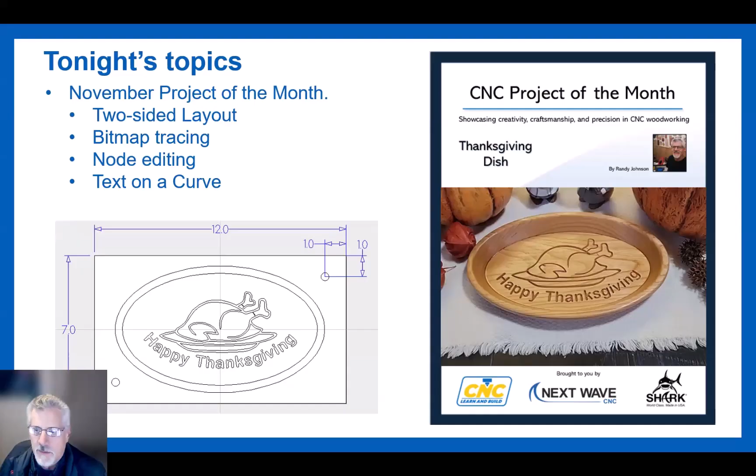So first off, most of you, I'm sure, have brought photos into VCarve to do tracing. I like to remind people that if you do a hand sketch, or somebody does a hand sketch, you can also bring that into VCarve just like any other bitmap and trace it. And that's how I did it for this project.

There's this little tutorial out here on how to draw a turkey. So I thought I'd draw my own turkey and use that as the piece of artwork. However, that colored photo that you see there on the screen, that would also work if you wanted to bring that in and actually use that for a tracing.

But I thought I'd give a try at doing a little felt tip pen work with the Sharpie. I like to draw it at full size, and that way the thickness of the line that I draw is pretty much the size of the line that comes into VCarve. If you shrink it down in VCarve, then of course the lines get closer together, smaller. If you expand it, they get wider. So there's kind of a scaling thing that goes on when you trace a hand sketch like that.

But the other thing I want to point out is that when you're all looking for artwork for a project like this, one of the places I spend a lot of time on is called Pixabay, and there's a lot of free clip art out there. And this pumpkin, for example, when you sign into Pixabay, most of the artwork is free, but they do have some stuff that's for sale. And you kind of have to watch it because, like a lot of these websites, it's a little tricky. You don't always know which one you're clicking on, if they're going to charge you or not, but it is divided up, so there's a lot of free stuff out there.

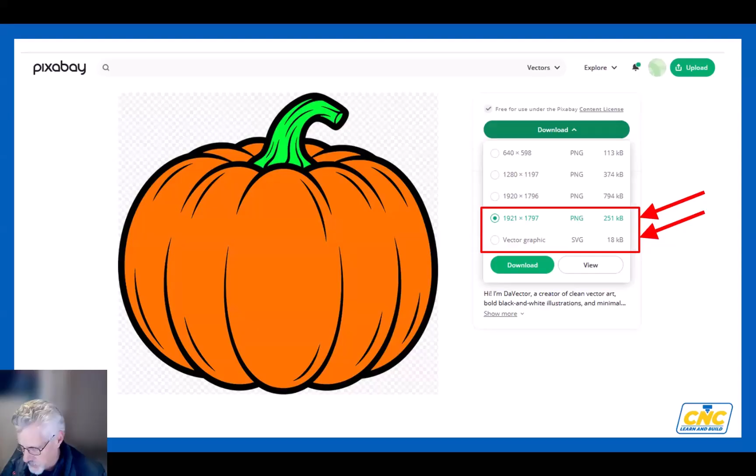Now, the bitmap or the PNG format, the photo that you see right there, you can bring that into VCarve and you can trace it like other projects tracing it. But if you're out at one of these websites and they offer you the chance to get the vector graphic, you might as well grab that and download that and use that, because most of the time that's going to save you a good bit of work and simplify it because you don't have to trace it. Here's a side-by-side comparison that the bitmap coming in is really, it's a photo, it's a piece of clip art, and that has to be traced. And where the vector graphics comes in, you pretty much go straight to toolpathing with it.

Now, what we're going to look at come December, when we start looking at the Christmas ornaments, I've started on that project, those ornaments, and there are some vector files that come in, and they still require some cleanup. So that's one of the little things we'll be looking at come December, what to look for.

But mostly what you're looking for are lines that are either duplicated, overlapping, you've got loops, you've got things that cause problems for VCarve. But every so often you'll come across a nice graphic like this one, which is nice and clean, and this pumpkin would carve real well just as it is.

So when you have the chance to get a vector graphic download, go for it, because it'll save you some time and you'll usually get cleaner lines out of it.

So with that, we'll hop over to the V-carve demo. Okay, so this dish that I made, this is cherry. It comes out of inch thick material.

And when you set the project up, of course, you'll go into job setup, if you're setting this up from scratch and picking your dimensions. But the two-sided setup, in this case, we're going to be surfacing or zeroing the Z off of the top of the board, whether it's the bottom or the top of it. There are times when it's valuable to surface off of one or the other. But for this project, since the board that I was dealing with is a nice consistent 1 inch thick, and there are no details that are of a concern as far as which surface I zero off of, I'm going to do it both off the top, the material surface. That just keeps everything simple.

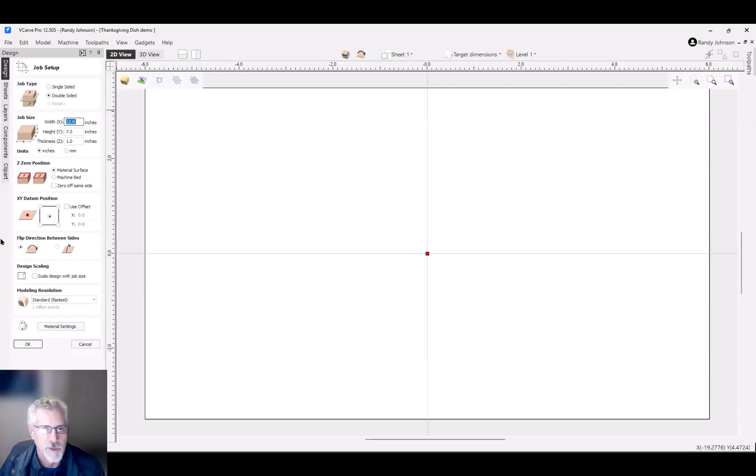I'm also going to put the XY datum in the middle, and then you have to decide if you want to flip left or right, or front or back, or top and bottom. And that's just kind of personal preference, depends on the project you're doing. In this case, I typically will flip left to right. It just seems more natural. Also, when I'm doing my imagery, the back image that way is still right side up, even though it may be backwards. So left to right is usually what I do, but it's just personal preference.

And we'll continue. Okay, so I've got some extra drawings in here. This is kind of how when I do an initial drawing, I'll set up what I want to accomplish, have a general thought for it. So up here at the top, these markings that are in red, the dimensions that are in red represent my fixed dimensions. These are my outer dimensions. From these dimensions are the ones I need to work with. I want to try and stick to those as close as possible.

And then the red dimensions down here, I want to put a 1/4 inch bottom, a 1/4 inch side on it. I want a 0.3 of an inch lip. And then this one that says 0.235, I wanted that dimension to be less than a 1/4 of an inch. And so to draw this out, it's a little bit back and forth on it, but starting out with a simple rectangle representing the side view. So let's go 10 inches on that for the width and 1 inch on the height.

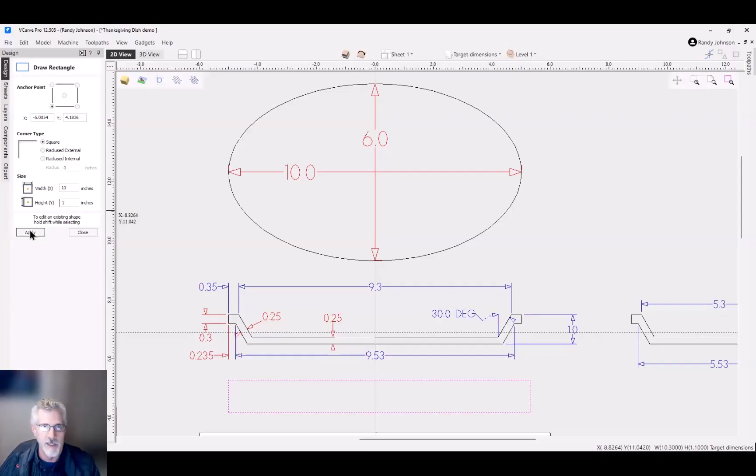And then it's kind of just simply a matter of deduction or taking away material. So then from here, there's lots of ways to do this. I'm just going to make it real obvious here. I'm then going to go in here and draw a rectangle on the bottom. You can see there on the right side, it says it's a 1/4 inch tall. So that snaps to a 1/4 inch, which is nice. So I'll just let go of that.

Then I'm going to go to the top up here, see if I get it to snap to 0.3 of an inch. There we go, or 0.3. That looks good. And then I start playing with some of my other dimensions. And since I already have these dimensions up here, I could use them, but let's go in and I'm just going to take a grab here. And this one is 0.35 like that.

And then to keep things simple, I can take that whole design. And if we notice that my datum, my X datum here is going vertical right there. If I make sure that this drawing that I've just created is centered on that, and it looks good, I can then take that little rectangle that I drew. I could use my mirror image tool and flip it about the job center, and it'll flip it right over to the other side. So I've got that going on for me.

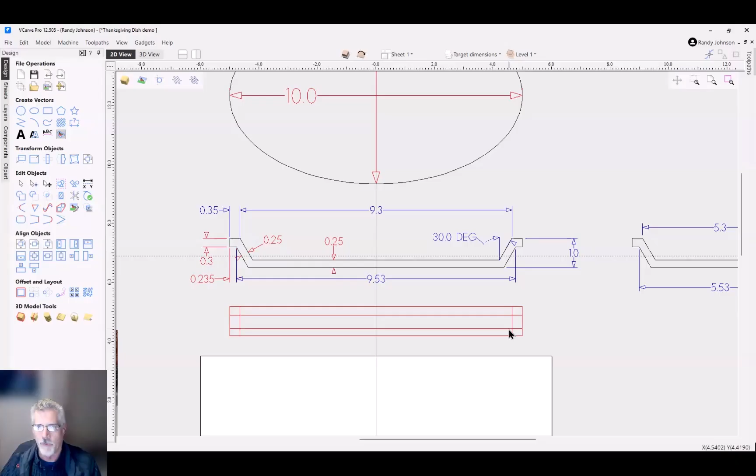Then we want to connect this upper quarter here down to the bottom with a 30-degree angle, because we're using a 60-degree bit. So I'll drag that down, depending on how close we zoom in there. So there we go, right? If I can snap it, there's 60-degree. So that gives us our overall 30 for that inside angle. And I'm going to mirror image that over.

And then I'm going to take that one and make my side, which is 1/4 inch thick. So I do my offset.

Now, when you work with the offset, you've seen this also with the profile toolpath. You'll see it says left, outside or right, inward, and left. What that means is pretty obvious if you have a circle, if you're on the outside or inside. But that black dot represents the start point for that vector. Think of that as the starting line. If you were starting at that point and traveling this direction, the left is this side because you're starting at that point, and the right is this side. So it also seems to make sense if we say outward.

So if I click right outward, it should create a parallel line to this lower side. Type in our dimension, just like that. Now notice that if I go into that line, again, that's the start point. If I go into node edit, see how that's green? That's my start point. However, now if I switch that start point to the bottom and make that the start point, close out of this a second.

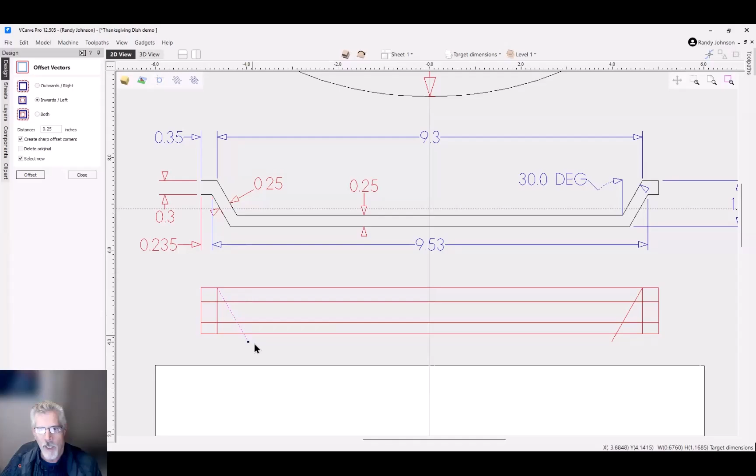Delete that line for a minute. Now when I go into my offset tool, notice that I need it to go to the left side, so I would select the opposite one. You want to watch when you're dealing with single lines, for that black dot representing the start point, to help you determine which side to go to. So this one, again, starting up there, this is going to be the left side also.

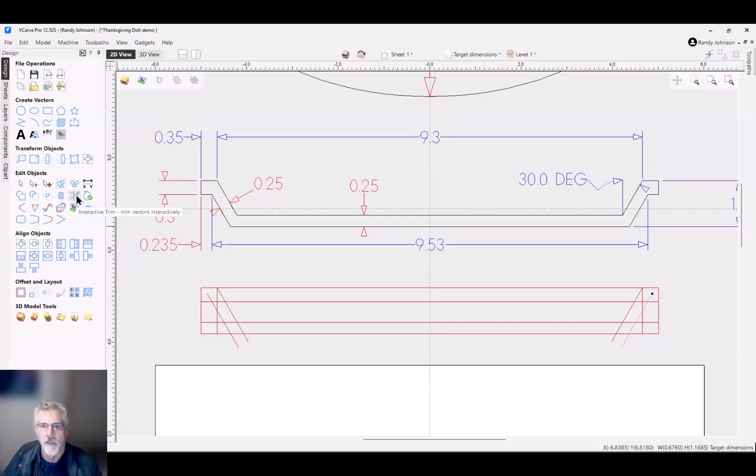So that looks good. At this point, we've got all the lines we essentially need, so we can go in and start trimming things away. So we'll start by trimming out these top ones, get the bottom ones along here, get inside here, and then get those.

And that's pretty much how I arrived. Now, this cross section is really just for illustration purposes only. It was just to help me figure out some dimensions. So now that I have that, I can go into my dimension tool and strike the dimensions that I need. That's how I arrived at these other dimensions.

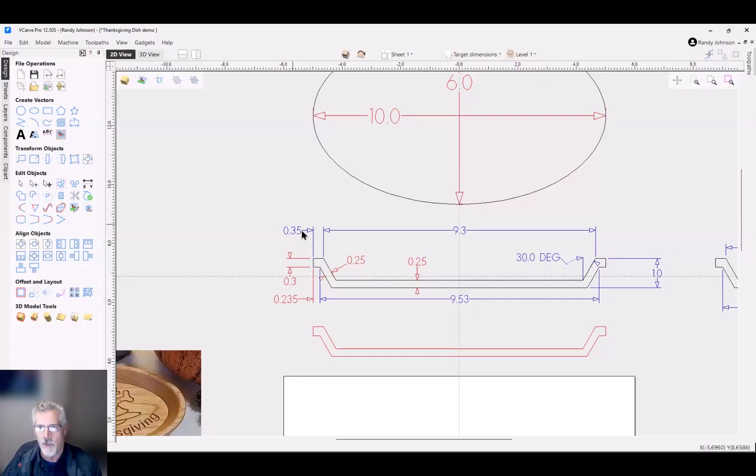Now, for practical purposes, I rounded some of these off to 2 decimal points or 3 decimal points. This isn't that critical of a mechanical shape that a small fraction of an inch here is going to make a difference. So to keep things simple, I kept things down to 2 or 1 decimal points.

So now that I have all those basic dimensions, I can go into my main drawing and start laying out my shape. So I'll take the oval tool. Again, we're going to take the anchor point. We want the anchor point to be at the middle of our project, so we'll type in 0, 0 for anchor point. And then the width of our project is 10 inches by 6 inches, and click create.

And I made an error. Yep, I have to go back in, let's undo that. 10 inches, not 13. Here we go. Okay, so we've got that set up.

Then I can start going in. I do have these dimensions here, 9.3 and 5.3. I also have the offset. Now, I want to point something out here. The offset tool, which we've used a couple of times, is really convenient. So if I go in here and I want to go inward by 0.35, I could type in 0.35.

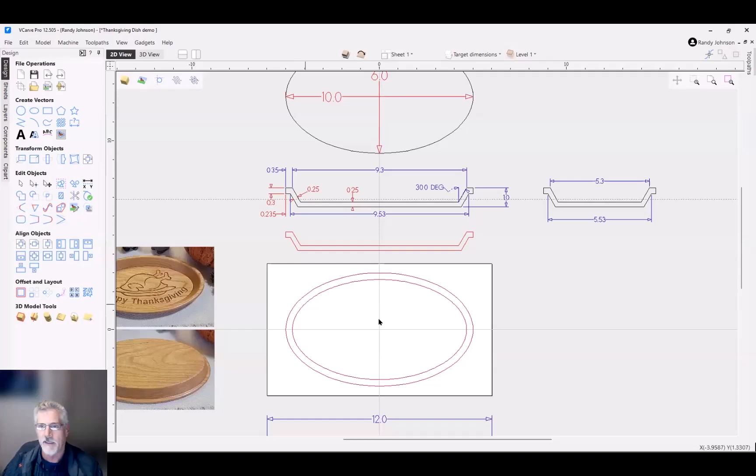Like that. And casually looking at that, it looks good, and sometimes it works out fine. But notice something, let's see if it does it this time. If I go into my outside vector and click node edit, you see how we have 4 Bezier curves around the outside. That's a nice clean image.

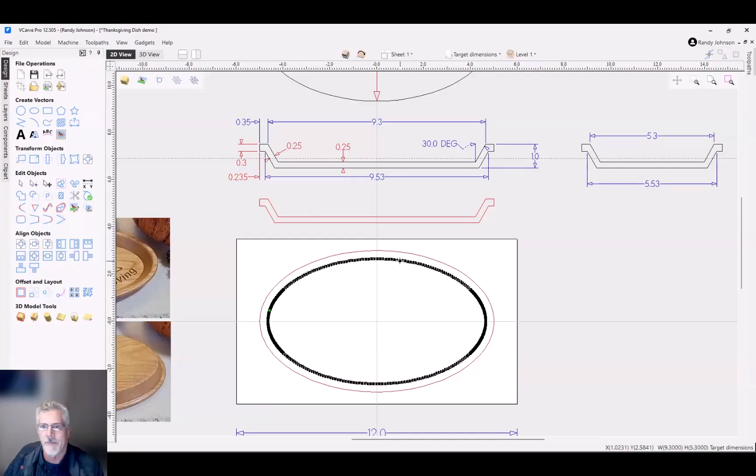The fewer points you have on a curve, usually the better, because the router is going to use calculations to go from one point to the other, and the more you have, sometimes that can actually slow down the router. If I click on this middle one, look what I have. When you use the offset tool, these aren't even Bezier curves, these are all straight segments.

When you go to carve this, the toolpath has to calculate the distance from each one of those nodes, and you end up with G-code, a separate line of G-code for every one of those nodes. It can really slow down your tool pathing, and rather than a nice curve, you'll end up with straight lines between all those points.

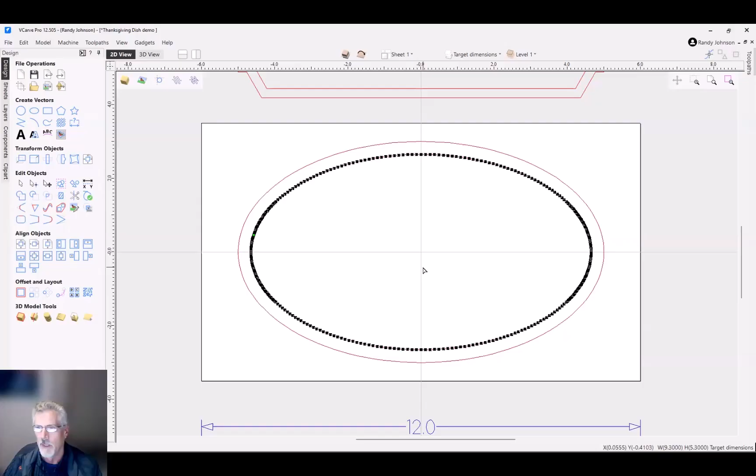You may not notice it, or it may stand out. I've used this approach sometimes with more organic shapes that have more S curves or something like that, and I've actually seen it start to flatten some areas out and get little kinks in it.

So rather than use the offset tool, let's delete all of that. I could go in again and draw another rectangle or another oval instead. Or what I tend to do, just from a shortcut standpoint, is hit Control C for copy and Control V for paste.

If we look here, you can't really see it, but there's two lines at this point. While that second line is still active, I go inside my size tool, and this is where I'll uncheck this—well, let's just leave it checked for a minute. I'm going to type 9.3 up here for the width.

And the height ends up being 5.58, where over here we're at 5.53. Oh, I'm sorry, that is correct—5.3 is right here for the width. Now let's figure out what's going on there.

Okay, let's apply that. All right, so what I had set up here was I had my link XY checked. So when you link it, it reduces it by the same percentage in both directions.

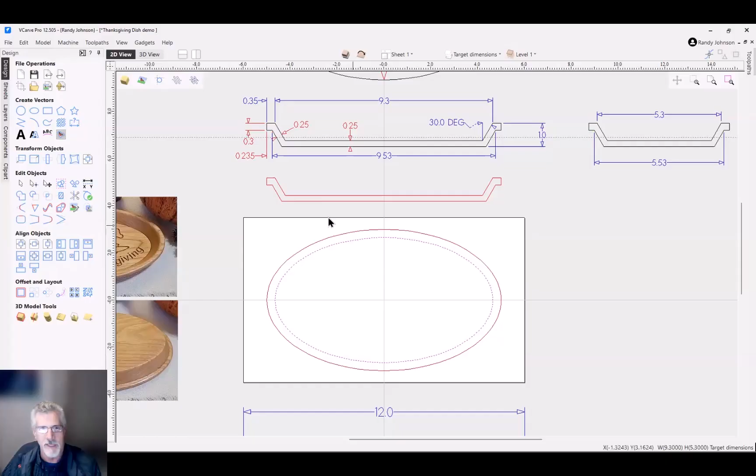And now I have a nice even space all the way around. That was kind of a long approach to doing it, because like I said, you could just go into the draw ellipse tool and type in another one. I tend to do it this way because I use the Control Copy and Control Paste keys a lot.

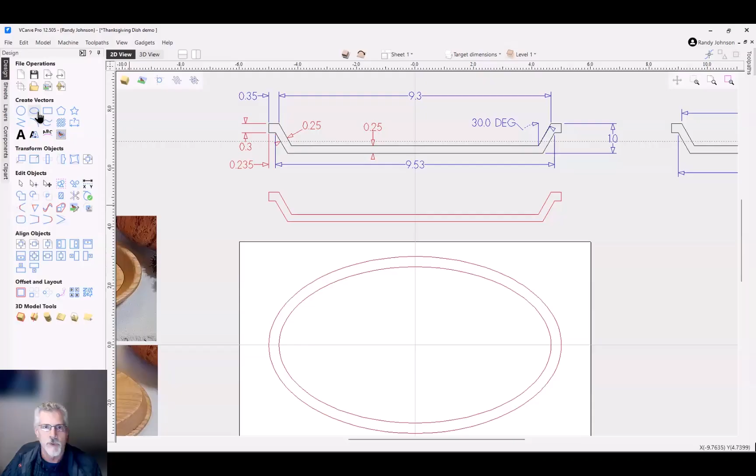So at this point we've got these two lines going, which represent these two points right here. Now we also need a line for this point and for this point at the bottom. So I'm going to take the long approach here and go into the draw ellipse, and type in my bottom dimension.

Which is 9.53 by 5.53. So we'll type in 9.53 by 5.53 for that. And then—looks like I still might need one more. Nope, I don't think I need any more dimensions.

Now what I'm going to do—this vector right here actually belongs to the bottom, it belongs to that point right there. So I'm going to right click on that and do a move to other side. You can see how it turned light green, and that's because it's on the other side. I also want my overall perimeter vector on the other side also.

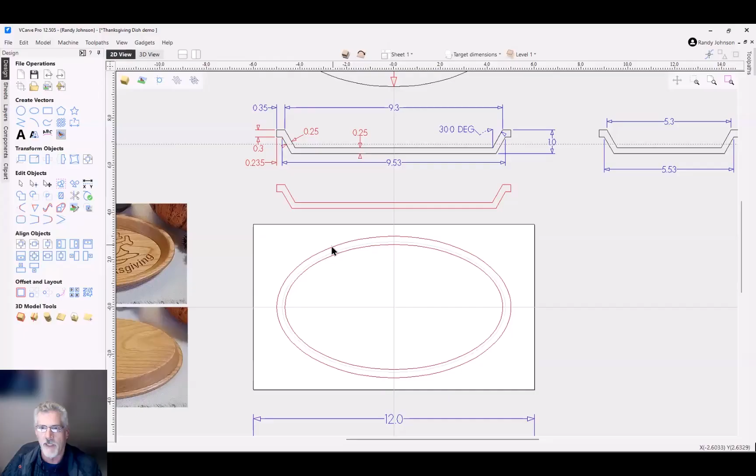So I'm going to duplicate that—or actually, rather than move it, I'm going to copy this one. Now up at the top here we've got flip to the other side, so let me flip to the other side for a minute. And there you can see the two vectors.

Now, the reason I only need those two vectors on the back side is because of the way the chamfer toolpath works—it's going to use this line right here. So I don't actually need a vector for this little bottom corner. I only need these two vectors on the top side and the other two on the bottom side.

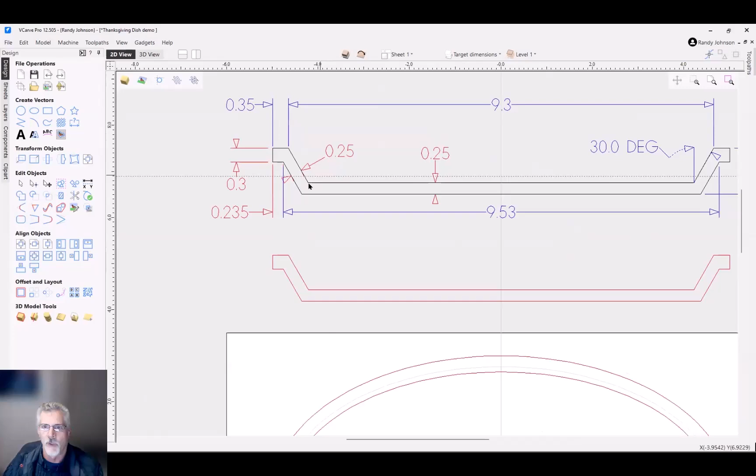Notice I also don't have an inside vector for this corner right here. There's no vector for that, because when I set up the chamfering toolpath, it's going to go from this point down to that, and it'll determine itself where that has to end.

Okay, next up, if we look at the design, because it's a two-sided project, I also need to add some holes for the registration pins. So let me turn those on.

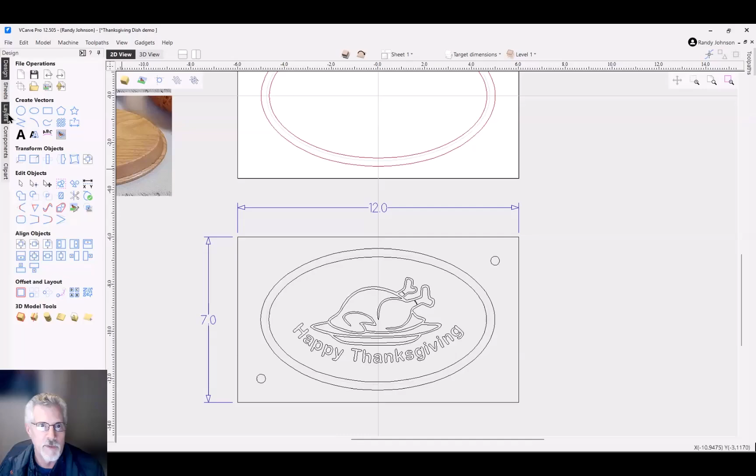So there you can see how I've got a couple little pieces of plastic tubing that I'm using for registration pins. It's all spelled out in the how-to document you'll get with the newsletter and download. What I use for these pins is actually 3/8 inch PEX plumbing pipe, like a supply line for under the sink or a toilet. I cut it off with a utility knife. I like it because it's very consistent in diameter, inexpensive, easy to cut, and it's not going to damage my router bit if I hit it. It's kind of consumable - if I need another one, I just buy a length of it. And if I lose one up the vacuum, no big deal, I'll cut another one. So that's what I use.

And the diameter of the hole, I set that at 3/8 of an inch. And in this case, we're going to go an inch in from each corner. So to set that up, I'll get the circle tool and set the diameter at 0.375.

Based on the dimensions that I have for my overall project, I'm going to measure off the middle. So off the middle, if I went all the way over, that would be 6 inches, so I'm going to come back 5. So it's going to be a positive 5 in the X, and a positive 2.5 in the Y. Let's see if that works out. And there it is - so there you can see I just drew that.

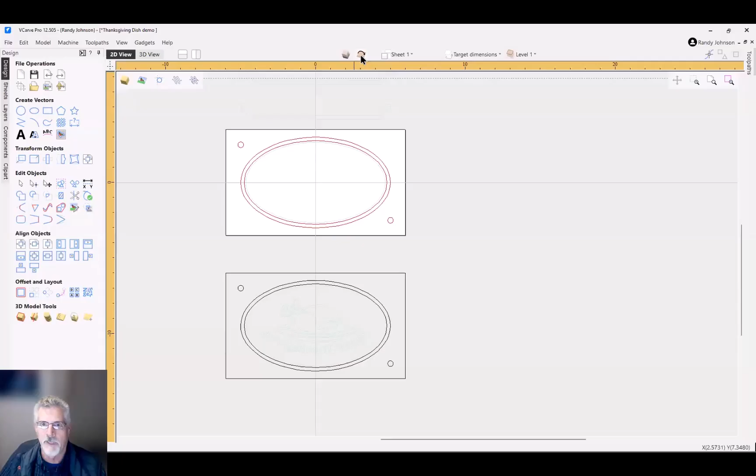Now notice how in this case it's the upper left and the bottom right. If we go back this way, it's the bottom left and the upper right. That's because we're flipping left and right. When we set up our table, we drill the holes inside the spoil board. This is actually the pattern that'll go on the spoil board so that the bottom faces up and the pins face down. And we'll take a look at that either more later today or next week for sure.

Okay, now that I have the basic setup going right there, the next thing is to deal with the graphics that we're going to set up. So for that, let me bring up - see if I have that. I had that in here someplace. I thought, there we go.

Okay, so that's the drawing. I imported that photo in here. It imports just like a piece of clip art.

Now, I don't need this whole piece of paperwork. And the way to crop inside of VCarve is to take a rectangle, draw a shape - you just need a vector going around your object. Hold the shift key down, select the clip art or the photograph, and you know it's selected when there's a little pink line going around the outside, usually darker in contrast. And then the crop tool is right here - you just click crop like that, and it just wipes out the background.

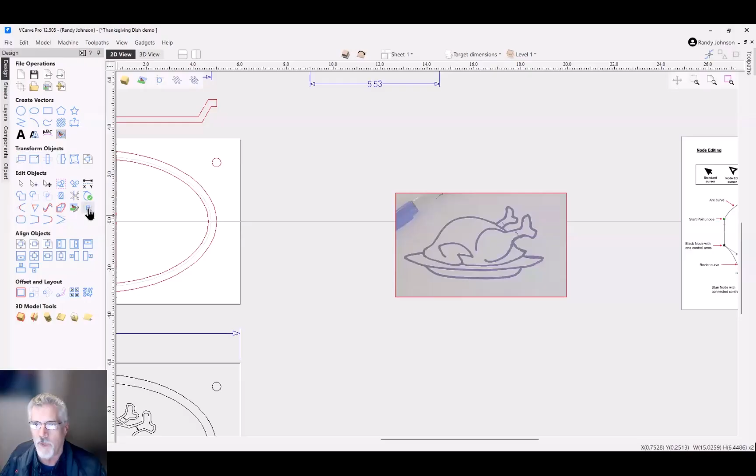And now if I slide the photo down, we still have the rectangle. We don't need that, so I can select it and delete it.

Now let me show you another little trick. Sometimes, like in this shape, if I didn't want that pen in there, I could take any of these shapes - even this freehand drawing tool works. If I just draw around this shape like this and go back and stop, then I'm going to click on the connect there. So it's connected - click, connect there. So now it's one continuous vector.

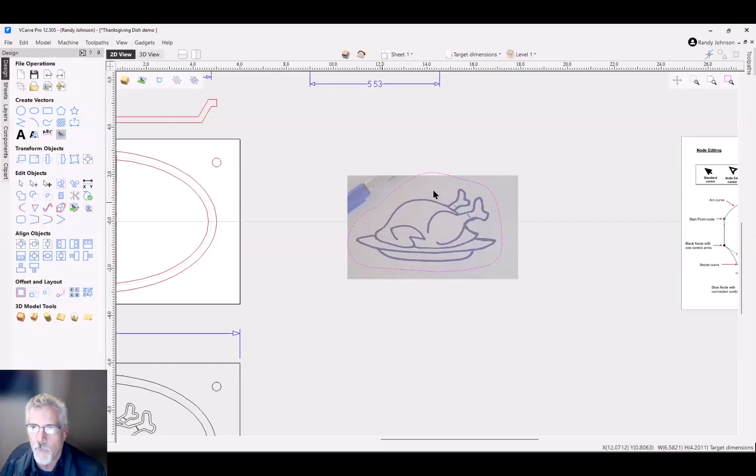Now notice when I hold the shift key down and select the photo, I'll do the crop again, and it crops it exactly to my line. So whatever your enclosed line is, whatever that shape is, you can crop it to that size. So that comes in handy.

Now to trace this, the basic tracing of this is pretty straightforward. We use this trace tool as usual.

Because there's some color here, and I used a blue ink pen on this originally, it's coming up with some different hues of blue. I really only need one, so I usually switch it to black and white, because that's really the image that I need. Then I usually put everything at middle to start with.

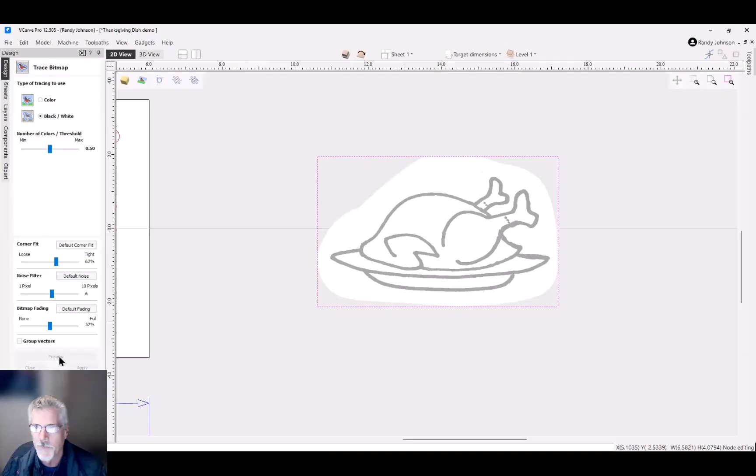I'm not going to group the vectors in this case. Preview, and there we can see the vector lines going all the way around. Apply and close. Now I can take these vectors. Let's drag that photo away.

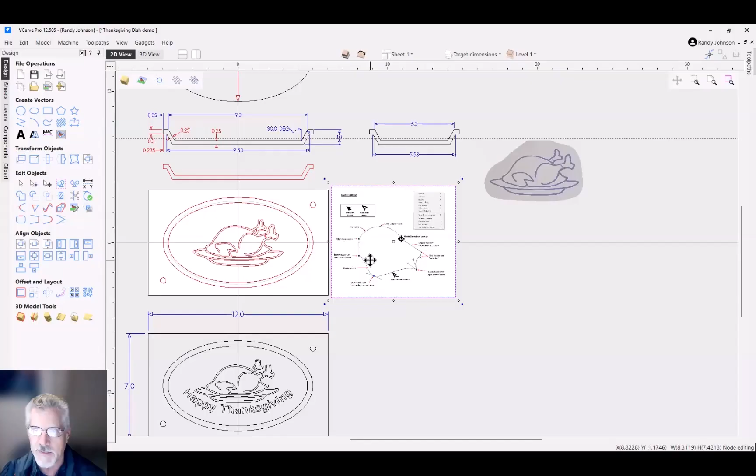I'm going to take that image and center it in my dish. And I'm going to drag this. This is some information - any of you who have looked at the online class, or taken any of my classes, this is one of the diagrams I offer people, and I'll include it with the email I send out. This gives you a rundown of what different node edit points look like.

I do a full demonstration of that in the online class if you want to take a look. But tonight I'm going to use this information to point out how we might want to node edit this turkey. First, if I select all that information and all those vectors, go down into node edit mode, I have quite a few extra nodes in there. It's not too bad, but it can be simplified.

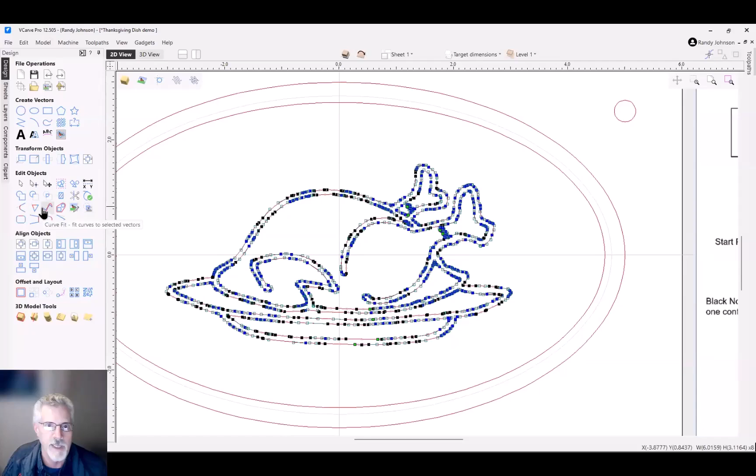So the first thing I like to do is go into this tool called Curve Fit Vectors, which helps remove some of the extra vectors. I'll always use Bezier curves about 90% of the time, with a tolerance of 0.005 - about the thickness of a piece of paper. For this drawing that's quite acceptable, if my line ends up within that much of the original line. I'm going to keep sharp corners because there are a few areas here I want to keep sharp inside corners. And I'm going to do replace selected vectors.

When I click preview, notice how it simplifies it - one click and we have like a half or a third as many vectors. This looks pretty good, so I'll say okay. As a result, everything has gotten a lot smoother.

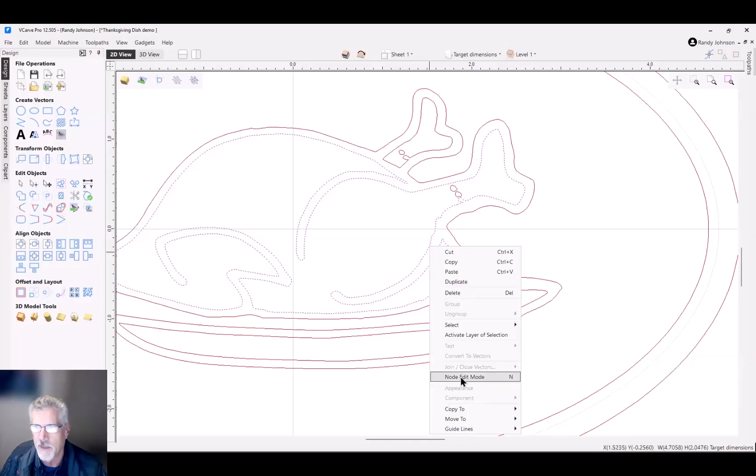However, we still have a couple of areas here with some bumps in it - maybe this drumstick, we want to even things out. So with whatever drawing you're working on, if you want to even something out, this is where learning to use node edit is really handy. I'm going to select that line, go into node edit - the N key is the shortcut for that - and that shows all these nodes. Remember, usually the fewer nodes, the better.

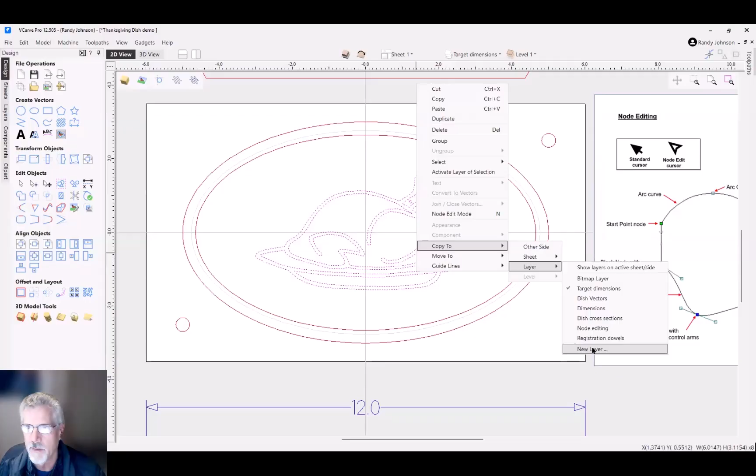So I'm going to start up here. Actually, I'm going to do one other thing first - go out of node edit. I'm going to copy all of this, and copy it to a new layer. I'm going to call this 'original' and give it the color green.

So there's the original. Right now my red vectors - let's do something here, let's turn that off. I'm going to select all those vectors. The only reason I'm doing them in red is that I had the target dimension layer activated. So I'm going to move all of these over to my dish vector,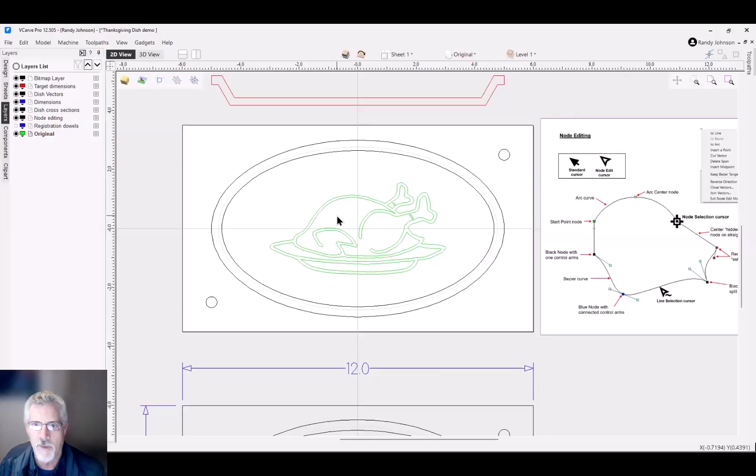which are black. Turn this one back on. Now notice how the green one is showing up even though the black one is there, and that has to do with the order things are in over here. It's kind of a reverse order - the one on the bottom is going to be the most prominent. I sometimes wish VCarve would flip this and make the more prominent one on top, but it's kind of the opposite.

So notice as I move this up in the order, when this vector goes on top of the dish vector, it actually means it's underneath it. Click like that, and now the green vector is hiding behind the black vector. If I turn this one off, you can see it's still there. So the reason I have that stacked - one more thing - is because I'm going to use it as my guide. I'll go into the original and lock that - you see a little lock icon here - that way I cannot edit or move those vectors.

I want those vectors to stay where they're at. So let's go in here, and I'm going to show you a little bit of node editing on this. We can see the green vector is back there - if you see it, it's still there - but I'm going to go into node edit, and this is where I go in and start getting rid of some of these extra vectors. To start with, I'm going to work on the top side of this leg.

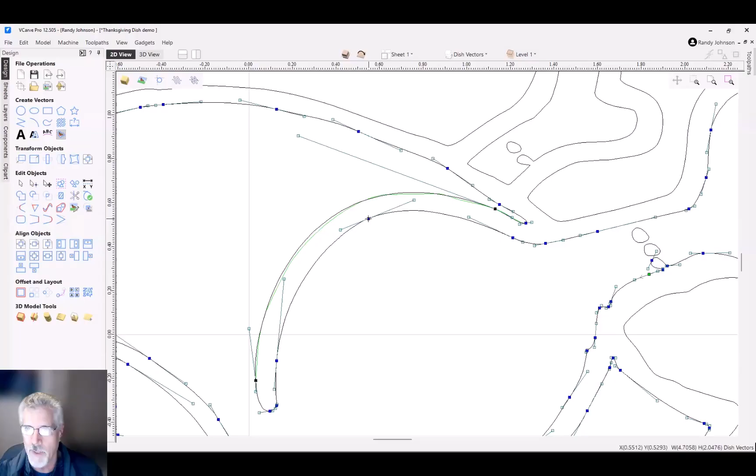A lot will depend on how much precision you need in your drawing, but this usually works quite well. Okay, here I'm going to hit the D key on the keyboard to delete that, and then I'm going to use this handle, go out like that.

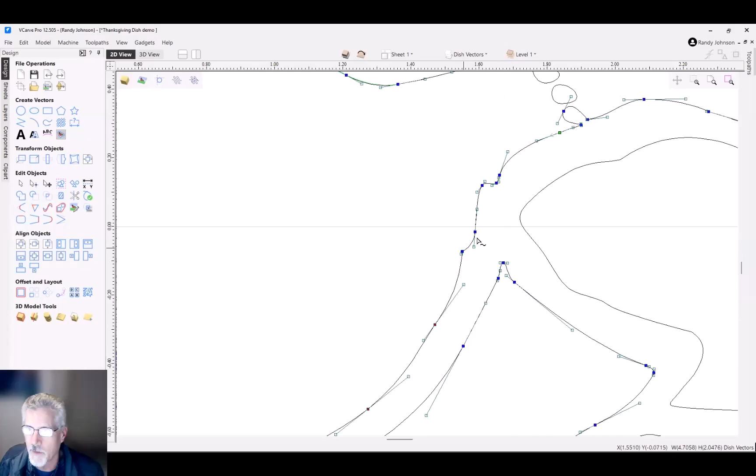Let's do the same thing down here. Now I'm going to hold the shift key down, click on that one, that one, that one, go all the way up along here, click on all the blue ones, and let's go all the way up to here. And then I'm going to hit the D key to delete all those, and they're all gone. Once again, so I've got a straight line.

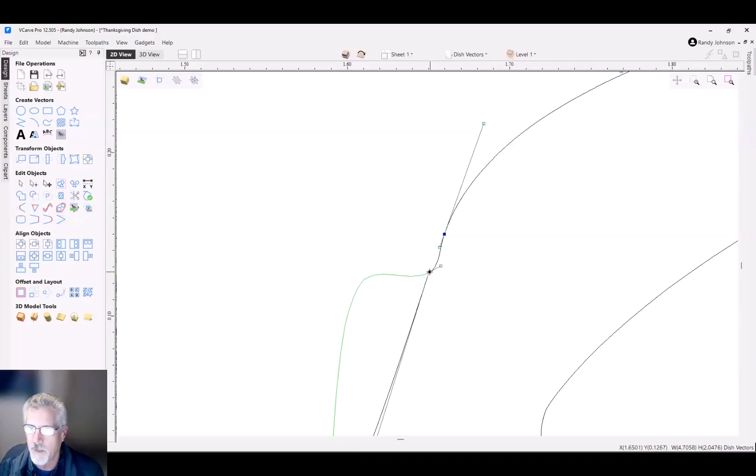So I can go in, convert that to a Bezier, stretch these down, get a nice even curve there. And then up here, let's just go ahead and delete this one. I'm going to delete that, grab that, and maybe I'll just move that out just a tad.

If you get in a situation where these two handles, like I'm dealing with now, just aren't getting you the curve that you need, you could then go into the middle and do an insert point, and it'll insert a Bezier handle in the middle, and then that one you can pull down or up if you need to. So don't be afraid to add an extra point - you just want to avoid a lot of extra points if possible.

Now, do I need to do this for this whole thing? No, I don't. But depending on the design you're working on, you may want it cleaner than this. Sometimes I'll just go in and rather than even do that, I'll just delete a bunch of points like this, grab the one that's there, stretch it down, maybe just delete that point. Let's see if I can delete that - delete, there we go.

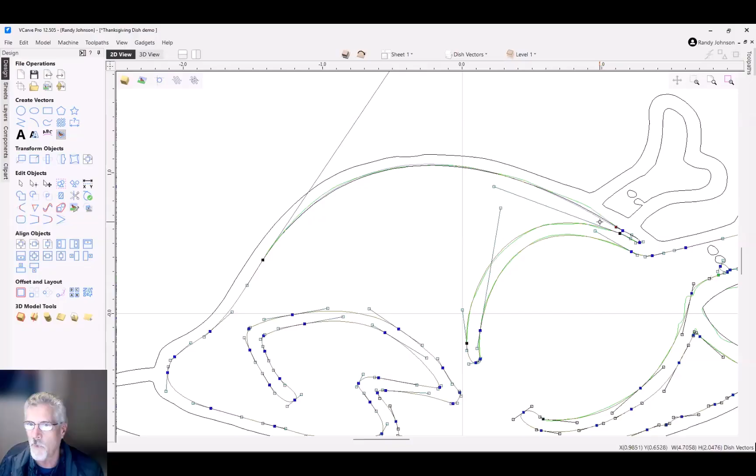You know, like up along the top of the turkey here, there's lots of extra points up here, so I could select them like that, hit delete, delete, delete. Once you get practiced with this, it's a little tedious, but it goes fairly quickly because as you can see, it's surprising how with only a couple of points you can match the line. I'm going to stop with that work there, but you can see how we've got some nice curves going on now where we reworked it.

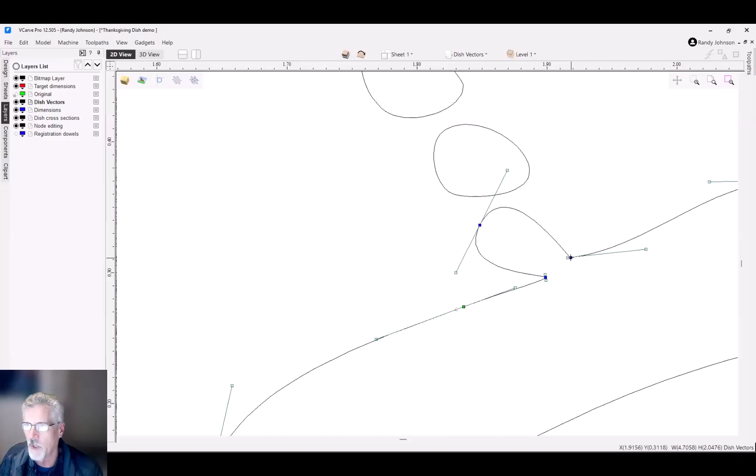You know, a situation like this right here where this little piece is connected - maybe if I want to do something different, I could go in over that node, right click, see if it'll get it here, right click, hit cut, cut that one. Then I could grab these up here like this, start working with those, decide what kind of shape I want. And then with that vector that's left there, I can simply connect it with the connect join tool. And then these, I probably want to bring down a little closer to each other, straighten that one out a little bit, and then I can do a connect on that also. And then I've just separated that little piece.

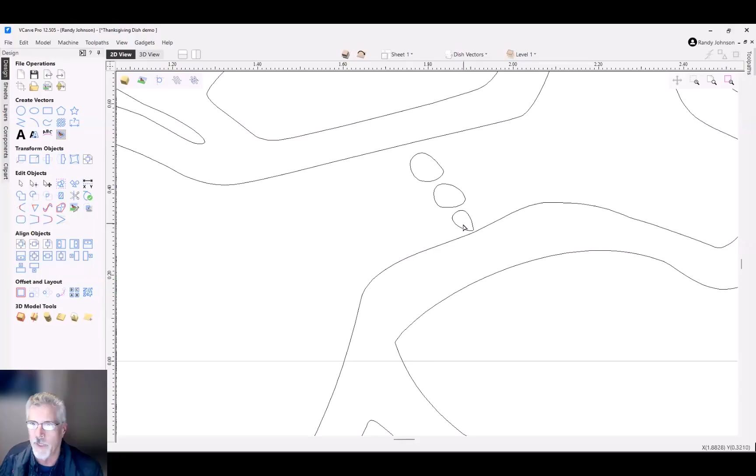So with that, I'm going to take that part for now and set it aside, and grab this one. Since this one's all done, I'll move that one back up.

I'll send this chart out, but let's look at it a little now. Each of those nodes does something different - you've got different types of line, and a right mouse click brings up a local menu. Based on what I have selected, I'm not able to change it to a Bezier, probably because it's already a Bezier, but I could change it to a line or an arc, and add or delete points. All these commands are available based on the type of node or section of line selected.

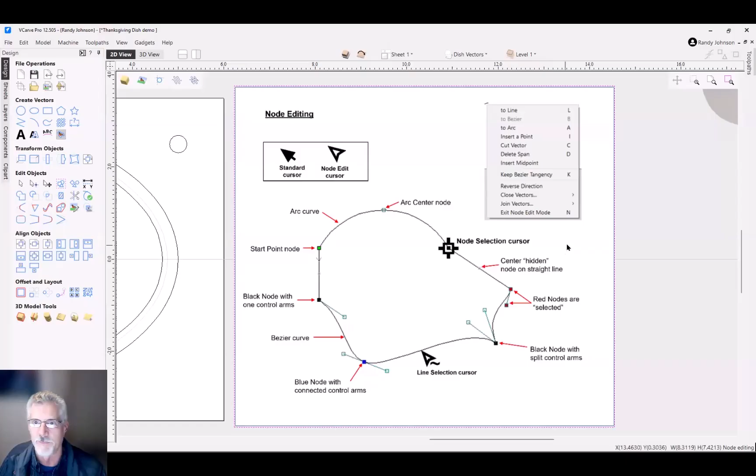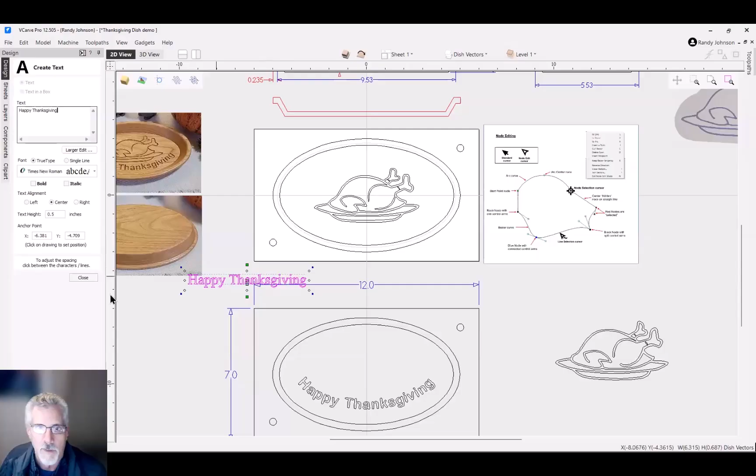Next up, we're going to type text on a curve. To start, let's select that inner shape right there - that's what I'll use for my curve. Before that, let's go into the text tool and type 'Happy Thanksgiving.' Close out of that, then select that curve and go into the text on a curve tool.

That looks pretty good, except we need it up a little higher. So I can add an offset distance - let's try 0.5 inches and see how that looks. That looks pretty good.

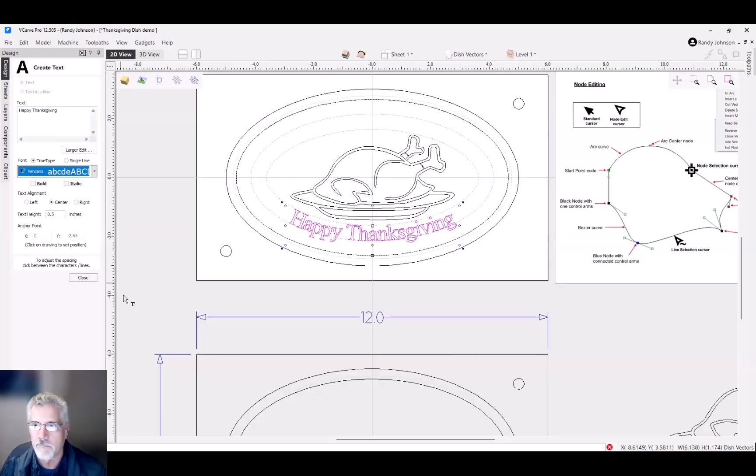If I want a different font, I go back into the text tool and look for different fonts, if there's a kind I might like. Let's try something like that - looks pretty good. Maybe I want it bold. Close out of that.

Now that I made it bold, we can see some problems here where things are too close. To solve that, we go back into the text tool.

Notice when I take my cursor and go up between a couple letters, you see a little symbol - a V and an A on the outside, and two little arrows pointed towards each other in the middle. That moves things closer together. If I hold the Shift key down, those arrows change direction, and now when I left click, it moves those letters apart. So I can just go to each spacing and get the spacing I want.

Right now, mostly I'm taking things and moving them away from each other, but there are times you'll use it to move them towards each other. This one's a little tricky, so I'm going to get in close. There we go - got that, looks pretty good.

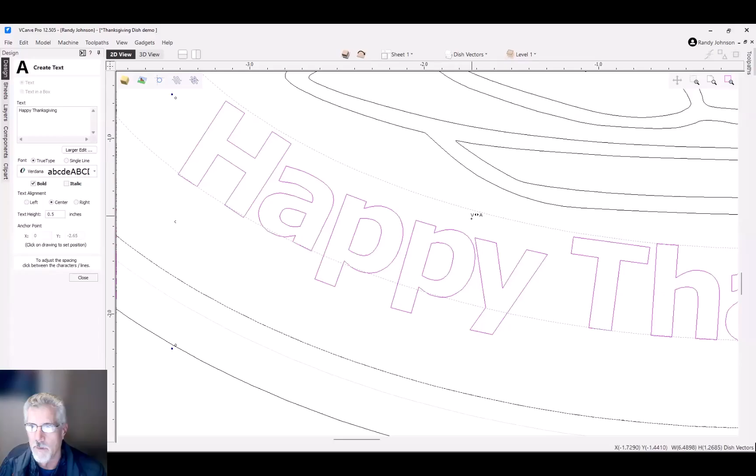Then I'll go over here, a couple of clicks on each of those, and put a little more space between that. Okay, so we've pretty much got that all set up.

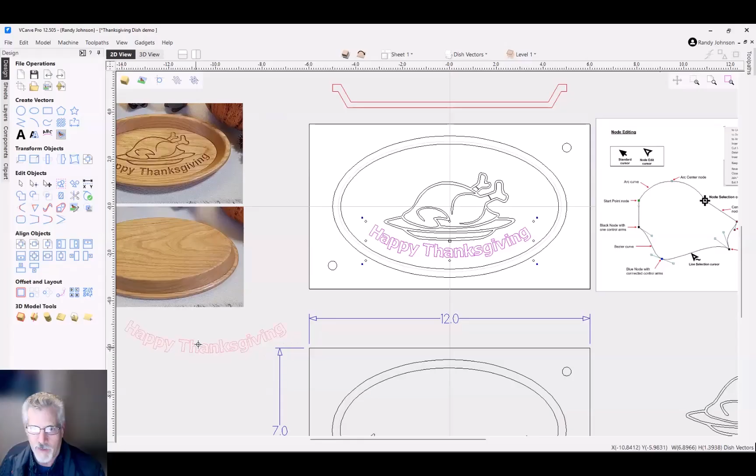Now, that was actually pretty painless. There are times when it doesn't happen that well or that easily. Let me take that for a minute, drag it down here, and make a copy of it. I'm going to do this all over again, and set this up a little different. I'll take that vector and go into Node Edit, and notice how the start point is at the top.

Okay, we got lucky - that's an easy place for it. But you may find that the start point might have been here at the bottom, and I can make that the start point.

This is usually what throws people a curve, so to speak. If I select the text and that curve, and now go into on a curve - it's like, oops, I'm upside down. What's going on here? Let's see - let's go on the other side of the curve. Well, that puts it on the outside. How about below the curve? Well, that's nice if I want it on the top side, but I want to get it to the bottom. How do I get it to the bottom? You could go left, you go right.

Well, the simplest thing to do is grab that. You see the green button up there? That's the center point for your text, not the start point for the oval, because remember we moved that to the bottom. But if I grab that, I can move the text and drag it, snap it down to the bottom. Now, of course, we need to flip it.

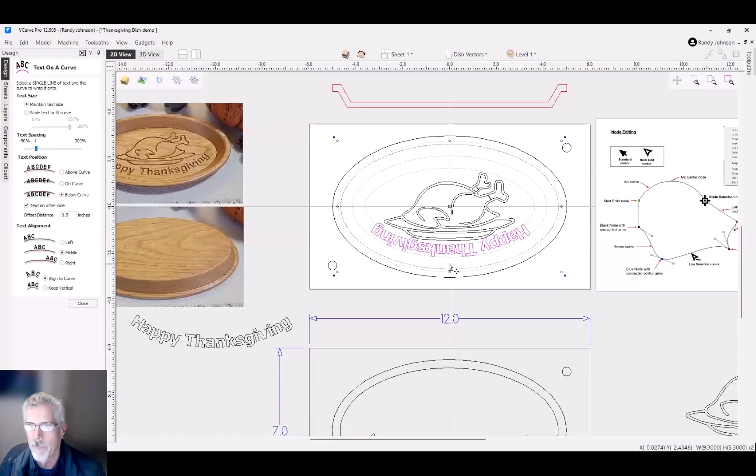So let's go above the curve. Okay, that's the wrong way. Now let's go the other side of the curve. And there we are, we're back in the money. So sometimes you just have to click around and understand, because you've got 2 or 3 options there that are flipping things around.

But once we've got that set up, we can now save it as such. So we've got the vectors for the front side pretty well set up. The one thing we'll end up doing yet, in fact I can see right now, I'm going to move this over and even move this up maybe just a little bit like that.

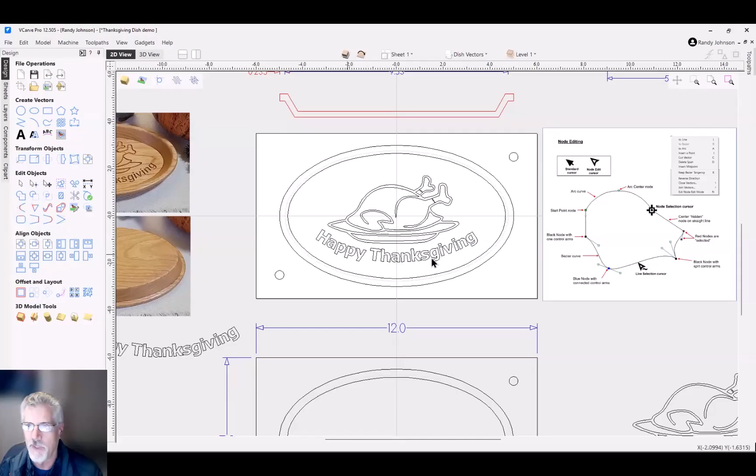Once we start doing the tool pathing, we'll find out whether or not this Happy Thanksgiving is in the right place or not, because we need to make sure it's set in far enough from that bottom edge, and we don't have a line for that right now.

We could calculate it, we could add it in. That'd be one way to do it. If you wanted to do that, let's just do a calculation on that. I'll go get my dimension tool, and let's turn the snaps on. Let's pull a dimension off of horizontal.

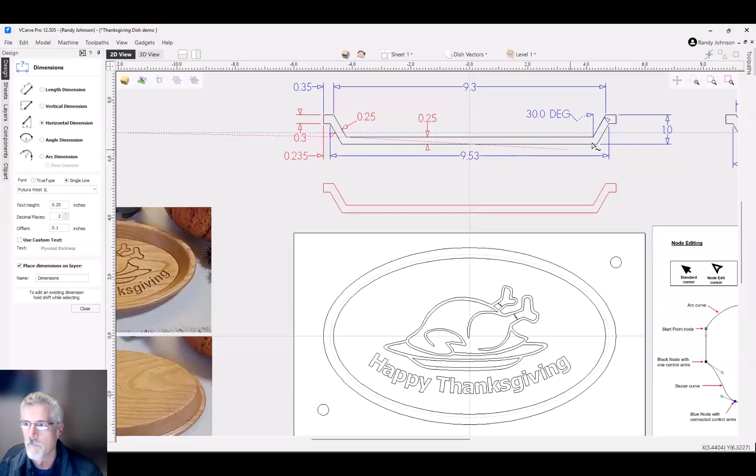Okay, so it's 8.43 on that inside, by 4.43. So if we went in and set up an oval now, 8.43 by 4.43, and that's the inside of the dish. So you can see why, before, this type was probably down here, it would have gone up on the edge of the dish.

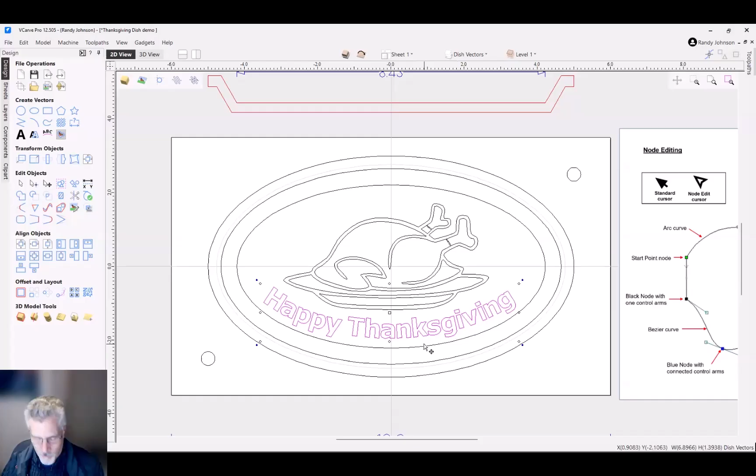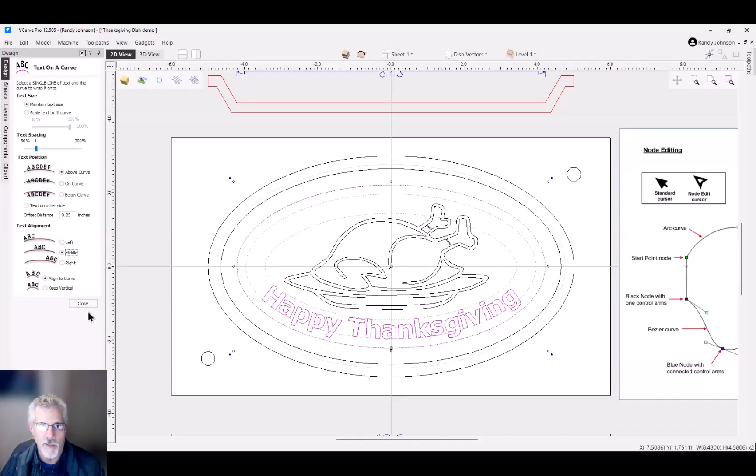So again, like I've said before, there could be 2 or 3 ways to do things. This is one way. I could even use this curve, if I wanted that curve to actually be the curve for my Thanksgiving text. Let's go ahead and recorrect or recenter that. I'll select that curve, go back into my curve tool, and now I can back off on the amount of offset. That looks pretty good, so that's going to be a nice even offset now from the inside corner of the dish.

If we go to the bottom side, there's not much to say about the bottom side until we get to the tool pathing. But if you wanted to add some sort of inscription, made by, or the year, or some poem or something like that, you can certainly add that to the bottom as well, same way that we did on the top.

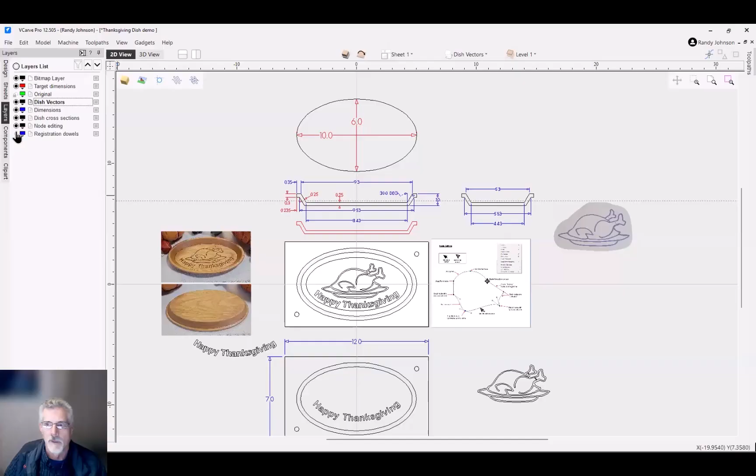Those alignment holes, do they go all the way through? Not necessarily. The index pins, or registration pins, that I'm using I cut those at about 1 inch long, and then I make my holes about 0.55 deep. So they don't in this case. On thinner boards, they may go all the way through.

Into your spoil board? In my spoil board, they go down, like there's one right here, about 1/2 inch deep into the spoil board. So do you drill those holes in the spoil board with the router, the CNC? I do, yes, absolutely. In fact, you can see how this is the top, the one we've been working on tonight, those index pins right there.

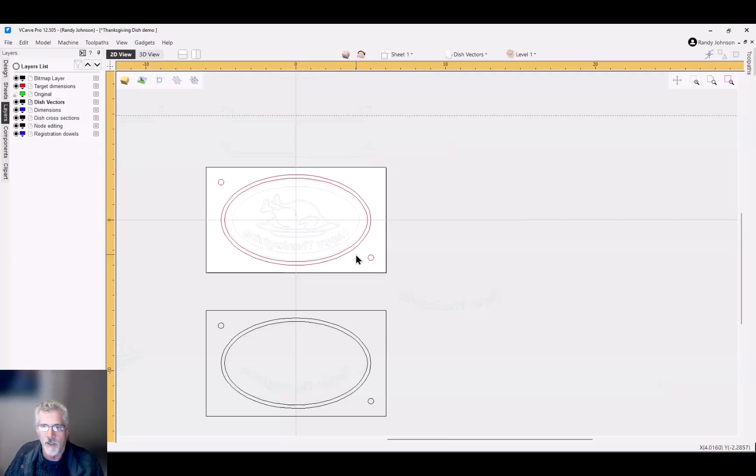I'm getting ready to flip this over. When I flip it over, if I flip this drawing over it, let's see here, flip this over right here, you can see how those index pins are in the opposite corners now. So these 2 holes that you see right here are the ones I will actually use to drill the holes into the spoil board.

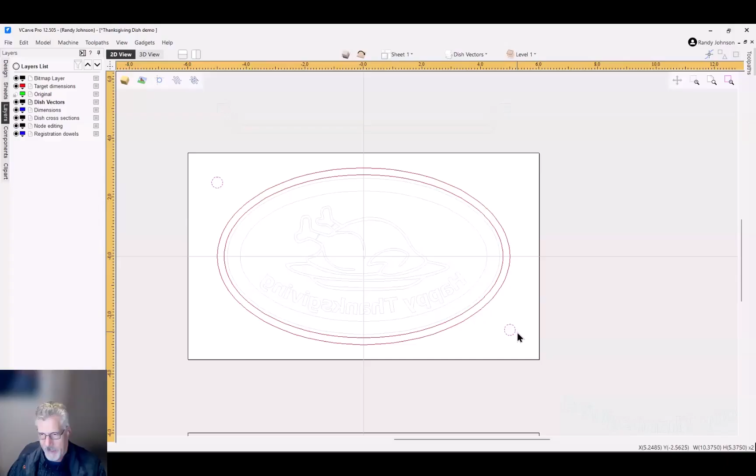So is that another tool path? Yes, that is a separate tool path. Is that going to be included in the project of the month? It absolutely is, yes, all the tool paths are included with the packet. And it tells you how to save them. We'll be taking a close look at that next week as well, how to create all these tool paths, how to save them, and how to run them. There ends up being about at least 8 tool paths to run, using 3 different bits.

And you said you did that with cherry? I did this one in cherry. This was cherry, but any kind of nice hardwood would work. This was actually a fairly light colored piece of cherry. I've used oak, walnut, maple. Seems like cherry carves better than oak - oak can be really grainy. Cherry, maple... cherry is my favorite by far.

I like cherry because it's light colored and it carves really well. Maple I really like as well - it's a little bit harder, of course, but it's less expensive and it's a lighter color. Almost 80% of what I do, I carve with cherry, maple, or walnut.

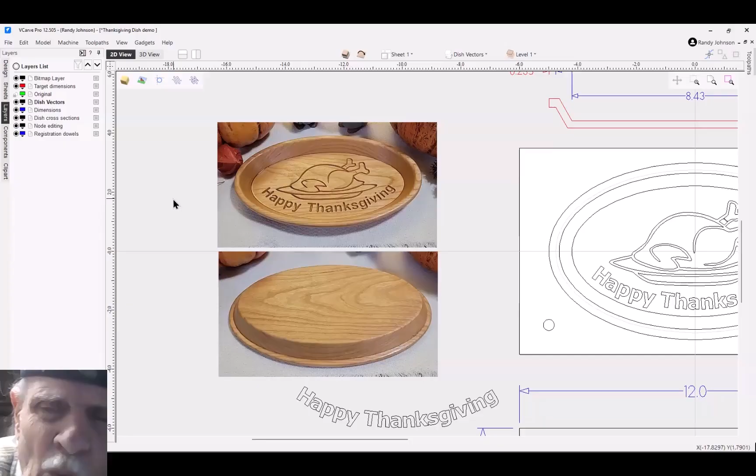What about hickory? Hickory sounds good, I've never carved it, never used it on the CNC though. I found a piece today at Menards - 1x6, 8 foot long, not a single knot in it. Nice! I think hickory can be pretty hard too, and maybe a little splintery, but I'll give it a try.

So I got distracted. How'd you go about spreading the letters apart?

Oh, to spread the letters apart? Sure, let's take a look at that. So I select the text just by clicking on it, so it's highlighted, and then go back inside of the text tool.

And when you go up to the letters, you see how, okay, there's my cursor. When I take my cursor up to the letters, it changes to a symbol - a little plus sign with a little V above it, and a couple arrows pointing towards each other. If I hold the shift key down, those arrows go the other direction, and when I left mouse click, it goes apart. If I let go of the shift key, it goes together.

It does automatically do that when you wander up into it - there's no special tools. The other trick is, if I want to spread this apart, I'm holding the shift key down right now to spread it. If I also hold the control key down, notice how it does a large amount as opposed to just a tiny amount. So holding control alone will jump it together in large steps - it's a way to quickly move things if you want to move them quickly.

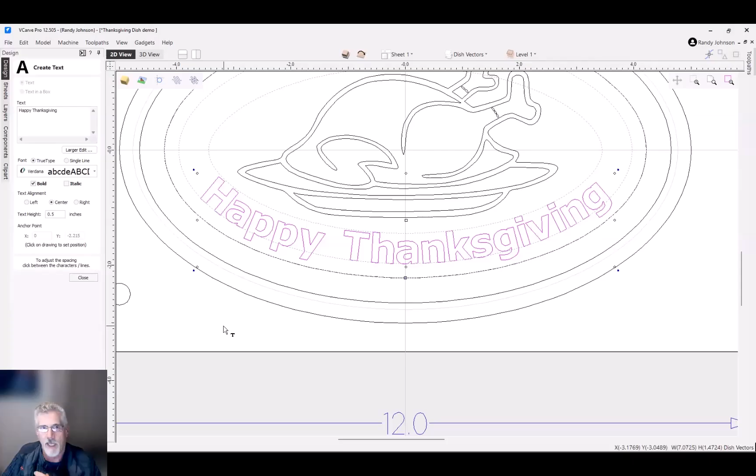Randy, you mentioned about classes - can you provide additional information about that? If you've been out to the Next Wave website, on the webinar page, down at the bottom, there are 4 VCarve classes that I have posted there, and you can find the links for that. Beyond that, I don't have a series of classes at this point, but I will be doing some eventually. I do a lot of one-on-one training if people are interested, and we're doing these webinars where people are free to bring up questions or ask about a specific technique, and I'll definitely address it.

Okay, because I'm at the very beginning stages right now, so can you provide information about one-on-one classes? Yeah, I'll put those in the email this week. That would be a really good place to start. I've also got another series I did.

Randy, this is Dick Reynolds - have you ever used AI to help you in design? You know, I have played with it a bit.

Hang on just a second. What happened with that guy? Dick, you can unmute yourself again if you need to.

I've been playing with it to create some 3D models, and there's about 3 or 4 steps you have to go through. Vectric recently released a little video on that. It's getting really close to being able to do that kind of stuff.

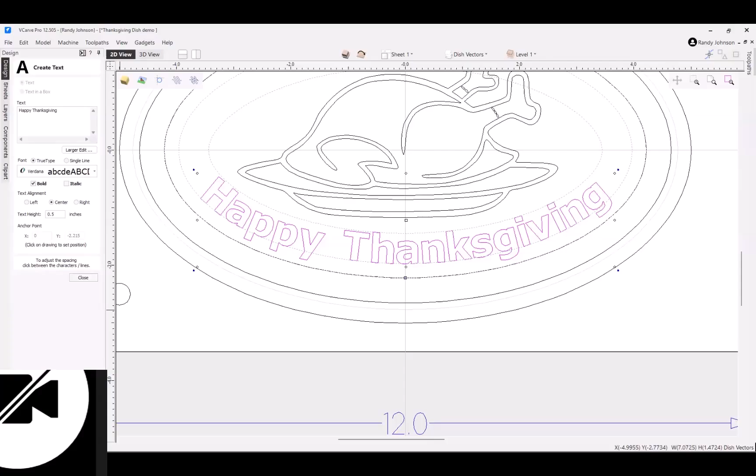Randy, who'd you say is releasing some? Vectric, the VCarve company - they released a video on how to use it to create some 3D art recently. Oh, okay, thank you.

So Randy, you can provide additional information about the one-on-one classes? I didn't get all the information from you.

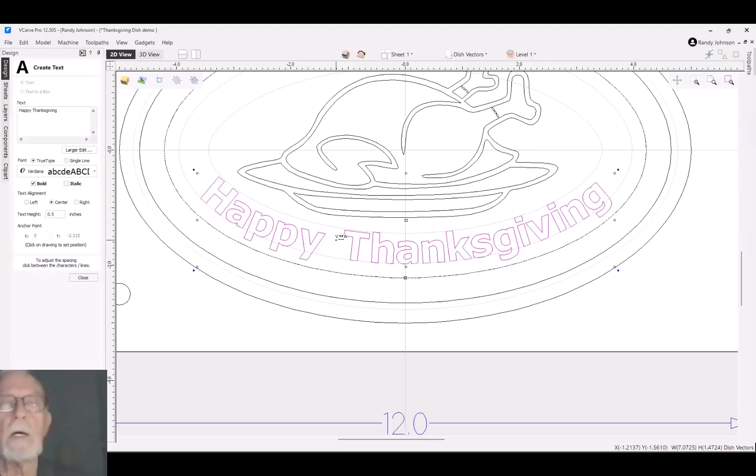Hey Randy, when you're moving those letters, if you add the Alt key, does that shift all of them at once? Shift, Control, Alt. I don't think so. It does. Look at that, okay.

Another great trick. So the other place that sometimes that is done, let's go back into the text on a curve up here. You could also click on this spacing here, and that's another place where you could space them all out. So if you need to space, like what we started out with tonight, everything was overlapping a little bit. I can't get back to where it was, but even now everything is too tight. So you could use this text spacing tool right here.

And then from here, typically... good, yep. So again, you mentioned the Alt key, that's another shortcut key for that.

Trying to step on your toes, Randy, but the gentleman who's just beginning, I don't know if you're familiar with IDC Woodcraft. He has a lot of free YouTube videos where he teaches basic Vectric stuff. He's really good too.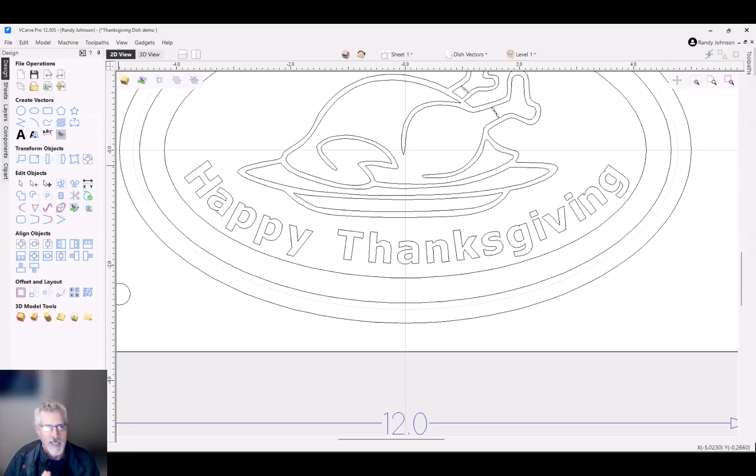So Randy, you mentioned in your one class, are you a school teacher? I was, years ago. Oh okay, you were. I thought maybe you taught industrial arts or something currently. Well, that's where I started out. I started teaching junior high industrial arts for a couple of years, and then I went into industry and ended up in the commercial world for the last 30 years.

So is this what you do? Yeah, it's kind of funny in some ways. I've had my own shop, I managed a couple of shops, I've been in manufacturing, a couple of manufacturing companies, but somewhere along the way it always seems like I ended up in some role relative to training in industry.

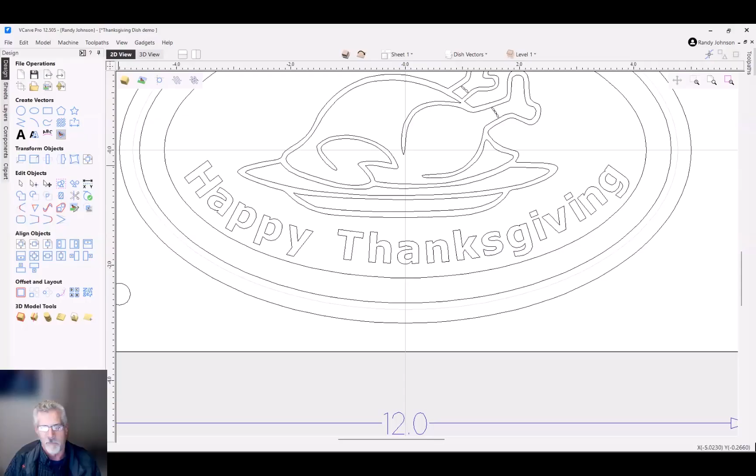So the question came up about using AI. Is anybody else out there in the group tried AI for anything for artwork? No, we use VistaSculpt. It's kind of cool.

VistaScope? Not familiar with that. Yeah, they let you do a free copy, you can try it for free, but you can't actually output anything. I signed up for it.

But you were on the Vectric group meeting or whatever it is, and you were a presenter when they presented the AI product they're going to be coming out with. It sounds pretty reasonable, pretty cheap. Yeah, I knew they were working on something, I knew it was only a matter of time. There's been several guys out there doing some hacks over the last couple of years, which required you to have like two or three different pieces of software, mostly free.

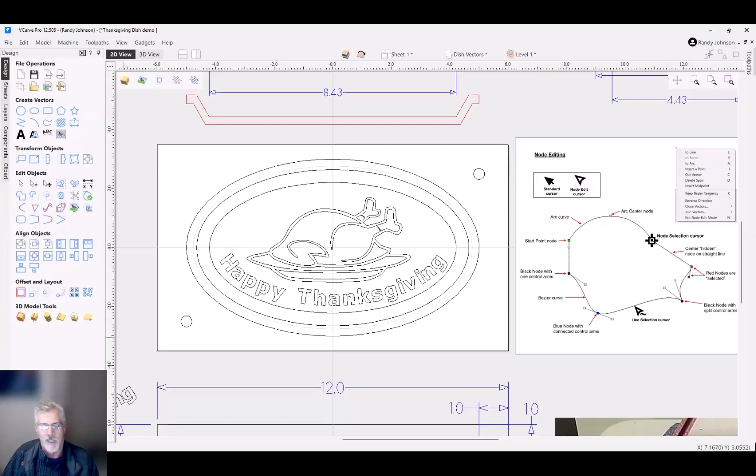And it was pretty capable, but it's really progressing very quickly. I've also noticed that on that Pixabay site I mentioned, a lot of their artwork is AI generated, which is fine. I mean, it's free, it's readily available, but there's just no end to it now. I'm kind of looking towards the time when I could use it to create, say, a Western scene or a hunting scene, and see what it comes up with.

Well, I get a lot of stuff off of Shutterstock. And they've got words across it that say you can't copy it, but I've had no problem copying it.

Well, they're mostly looking at if you were to put that on a brochure, an advertisement, or marketing and stuff like that. I try to respect copyrights when I see them. I usually keep track of the copyrights I'm using, but there's a lot of free stuff out there, even from that company.

Well, if you're just talking about standard vectors, I guess with ChatGPT you can generate pictures from that. Oh, and then absolutely, VistaSculpt, I did that to do 3D stuff.

The thing that's neat about the 3D stuff, and this is what I've played with a little bit, is that for years there's been techniques where you could take a black and white negative or photo, and it'll carve the light areas shallow and the dark areas deep. It seems like, hey, it's a black and white photo, that ought to work really well. But what I have to point out is that if you look at a person's smiling face, if they have dark eyebrows and light colored skin, their eyebrows are going to be holes in their forehead because they're dark, their teeth are going to stick out, their light colored hair is going to stick out, and a shadow is going to go back. It ends up being, and it used to be, pretty ghoulish what the results were.

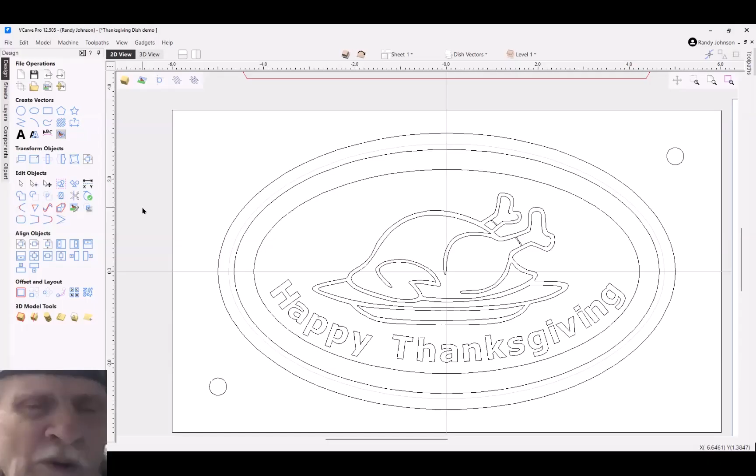Well, the node editing shouldn't be too much different. I have to go in and try it again. Yeah, a lot of stuff I download is rough, the edges are rough, and if you shrink it down small enough, it'll carve. But if you blow it up bigger, you've got to really clean it up.

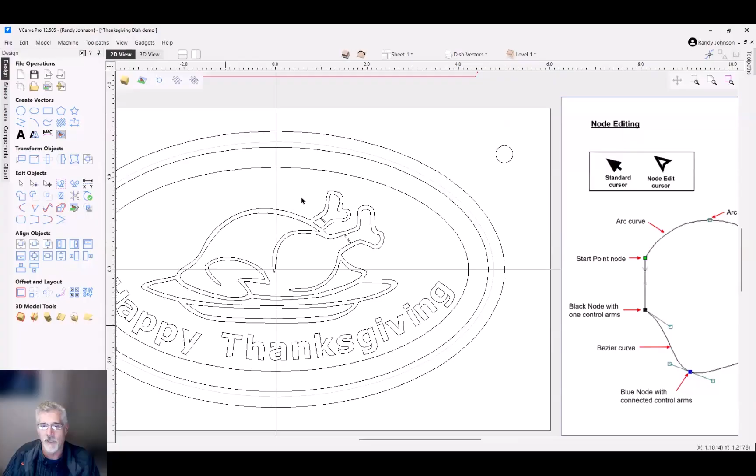Yeah, for those of you who haven't done node editing, I know this looks pretty overwhelming, but if you start with a simple design like this one I had to start with down here, I could spend 30 minutes cleaning that up, or an hour if I was just beginning. So it can be a bit of a cleanup. That's why it's important, when possible, to start with as clean of clip art as possible. Clip art that's a little blurry gives you rough edges. Clip art with shading will give you rough edges too. So you want nice clean clip art if you're going to trace it.

Yeah, so you can see the picture right here, and we'll look at this next week in detail, but I used a 1/2-inch straight bit to clear out this bowl area first, then a 60-degree V bit for the edge and for the turkey design. The 1/4-inch bit that's in there right now was used to cut the dowels for the registration. So those 3 bits did everything.

This isn't actually a 3D design, it's just a 2.5D design. Yeah, I guess it's a good thing you call it 2.5D. Sure, okay.

So you said you used a 1/2 inch straight bit. In lieu of that, could you use a 1/4 inch? You could, sure, for cleaning out the bottom of this. Yeah.

This is a 2-horse spindle on my HD 500, and the 1/2 inch bit works well. If you have a smaller tool, like an SD or a Piranha, the 1/4 inch probably makes sense. I have a 2.5 horsepower, but it's only a 1/4 inch.

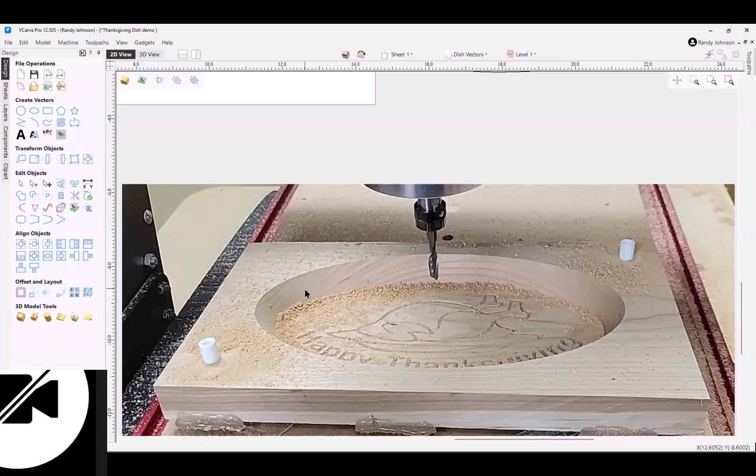The 1/2 inch bit that I used had a 1/4 inch shank on it as well. So you can get a 1/2 inch bit with a 1/4 inch shank? Oh, you can? Yeah, it wasn't an up spiral, it was just a straight bit. I'll have to look that up.

Yeah, it's not a problem, it works out well. In fact, it's one of my go-to bits.

I don't know how many of you are familiar with Mark Adams School of Woodworking down near Franklin, Indiana, south of Indianapolis. If you're looking for a week-long class, vacation time kind of thing, he hosts hundreds of classes every year down there.

And I have 6 of these HD 500s down at that school. They all have 1/4 inch shank collets on them, and I use that 1/2 inch bit in all those machines.

It works quite well. Where do you get that, what brand is that? Whiteside makes one. There's some off brands. Freud makes one. And it's just a 1/2 inch straight bit.

It is, let me see if I have a picture of it here. Let's see... Woodpeckers makes it too. Absolutely, like I said, it's a pretty standard bit.

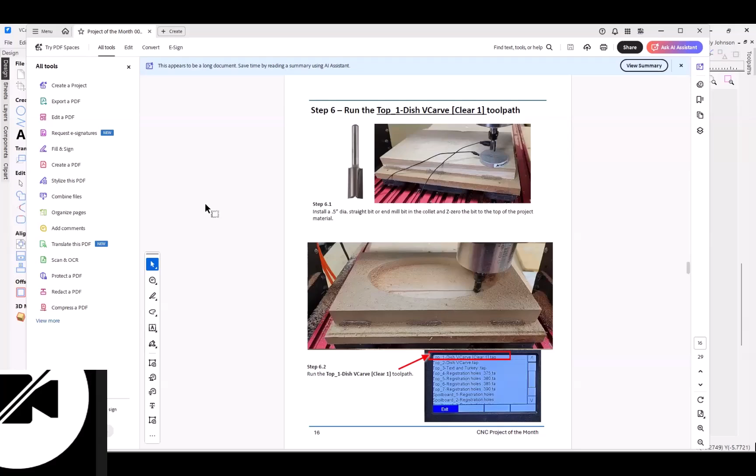As far as creating or putting a tool in your database, what do you use? I just use the same end mill setup, a 1/2 inch end mill setting, and feeds and speeds aren't that much different either.

In fact, Randy, remind me of that next time and I'll show you how to add this bit to your tool database. Okay, yeah, because I actually have that bit. Yeah, if you have it, I'd use it.

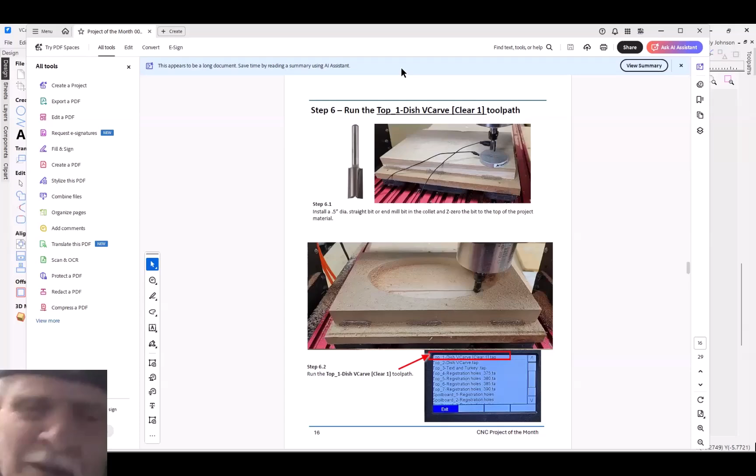Okay, yeah Randy, I just ordered a Woodpecker bit that's a bottom cutting end mill. It's actually got bevels across the bottom for bottom cutting.

So this bit right here, that's what's called an end mill because it has shearing action on the bottom edge. Also happens to be a spiral, which is typical of end mills. This type of bit, you can essentially drill with it because it has that end cutting end to it. It's still advisable to use a ramp as often as possible, but yeah, that's a really good bit.

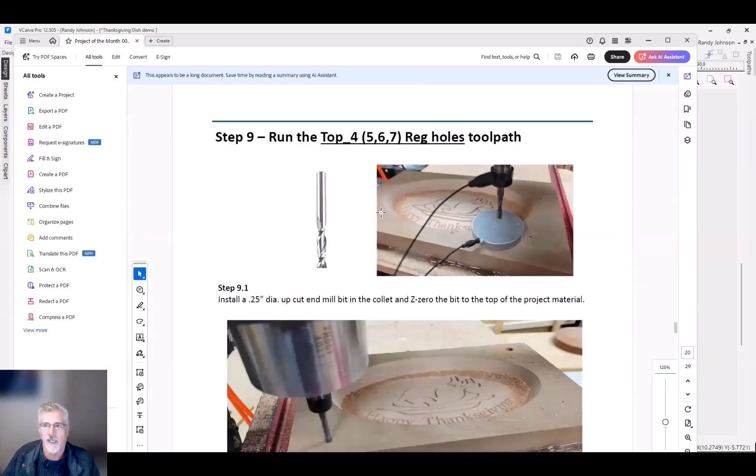So the tool path that's created with this project of the month is for the 1/2 inch bit. Yes, for the one with the 1/2 inch, you set it up with a 1/2 inch bit. For this one right here, it uses a 1/4 inch bit tool path.

So did you glue that project to your spoil board? Yes, I did that with hot melt glue. Yeah, I see that, so I know that topic came up. In fact, Fred sent some information out to me this week. We're going to get to it. I'm going to put together kind of a show and tell for one of these meetings. Fred sent me some nice pictures of his spoil board setup where he's using cams and some hold downs and such. I use a variety of hold down methods for a lot of projects like this. I just put a couple beads of hot melt glue around it like that, and it's surprising how well it works.

So from there, just a quick one. There you can see the list of tool paths, some of them. And that's a quick peek at the V bit that I use. It's a larger size, but a small one works also.

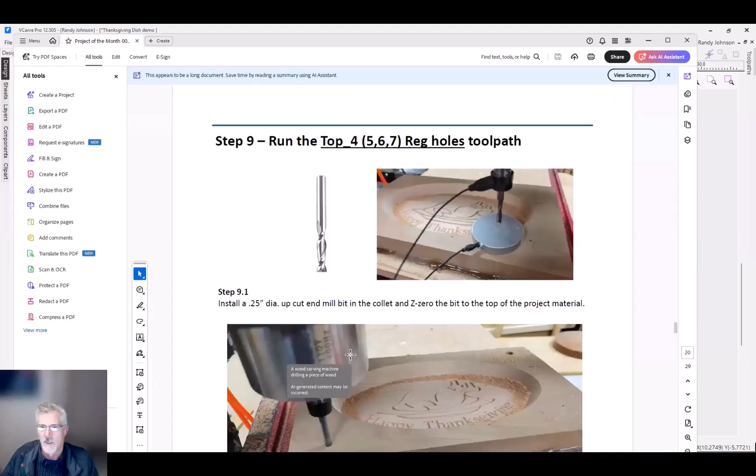But let's look down here. There's the registration pins. Yeah, so again, that's the 1/4 inch bit that I'm using for doing the holes in the project, and then making sure that they fit.

Oh here, so there you can see I'm using just an old chisel to pry it off the table, and it takes that to pop it off. What I like about it, it does lift a little bit of fiber off the table, but it doesn't cause hardly any damage compared to if you're using screws, which is another method for doing hold downs.

And in my case, this table, I don't have the other holes. Some people put a lot of other holes in the table for hold downs. I have used those, I'm pretty pragmatic, I kind of go with what works. And in this kind of project, this worked out really well.

So that's the one where you have a spoil board on top of your spoil board. This is the one where I actually glued a piece of 3/4 inch MDF on top of the black spoil boards from Next Wave.

This isn't a 510, is it? It's a 500. Okay, I would say it looks a little narrower. A little narrower, yeah.

Yeah, this is a great little machine. All sorts of fancy stuff in mine. I've got the HD540 and I put T-tracks and dog holes and 1/4-20 threads. And you know what, I'm scared to hit clamps, so I basically double side tape everything.

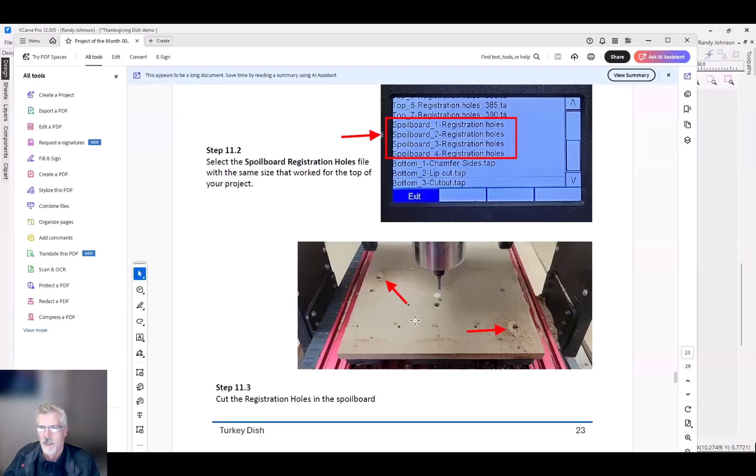That white hole in the middle is where I had another registration pin that I patched - I just stuck a dowel in it and planed it off. So you can see my spoil board is exactly that. I'm not afraid to cut into it or drill into it. I make use of it as a mounting table as much as possible, and when it gets a little rough, I just put a new one on.

So I'm going to ask a question unrelated - I missed your last Ready2Control course. Are you having another one sometime in the future? For Ready2Control, yes, I will be having it in the future. The recording for that is available from the last one if you want to catch that.

Oh, it is? Is it on that page? Yeah, it's on the webinar page also. You scroll down the webinar page and it'll be on that page as well.

Because I really like Ready2Control, and I've got a monitor and a computer on my machine for it, but last time I used it, somehow it locked up right in the middle of the project, so I just haven't gone back to it yet. So I really like Ready2Control also, and it has served me really well.

Keep an eye on that - you want to verify what version you have of it. Make sure it's the most recent version.

Is your computer in the shop? Does it have internet access? Okay, because if you're logged in, you should get a notice that there's an update available. The other possibility is that sometimes if your computer is overloaded, that may cause it to stall out. But if it happens once or twice again, I would suggest calling tech support and having them help you diagnose that, because that program has proven to be really reliable, and it shouldn't be doing that.